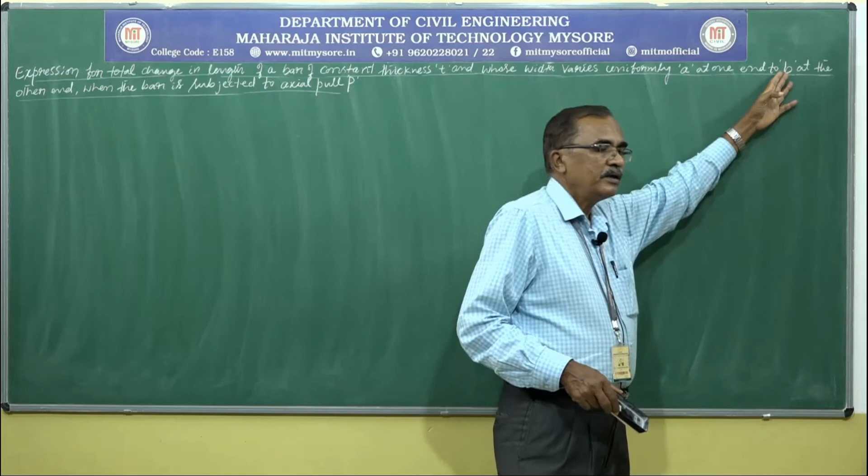Now let us consider another expression to find total change in length when a bar of constant thickness T, whose width varies uniformly from A at one end to B at the other end, is subjected to an axial pull. Here I have denoted it as A and B. It may be other than capital A and capital B also, no problem. In other words, this is a rectangular tapering section with a constant thickness.

The previous one is a circular tapering section whose diameter varies from d1 to d2. Here it is a rectangular taper section having constant thickness whose width varies from A at one end to B at the other end. So let us consider a bar of uniformly varying section having a constant thickness.

The figure is same as before, except that here we use A and B for the widths in place of D1 and D2.

Again consider a fixed end at the top. This fixity indicates that there is equal and opposite pull, subjected to axial tensile force. Let the width of the bar be A at one end and B at the other end. Let L be the length of the bar considered.

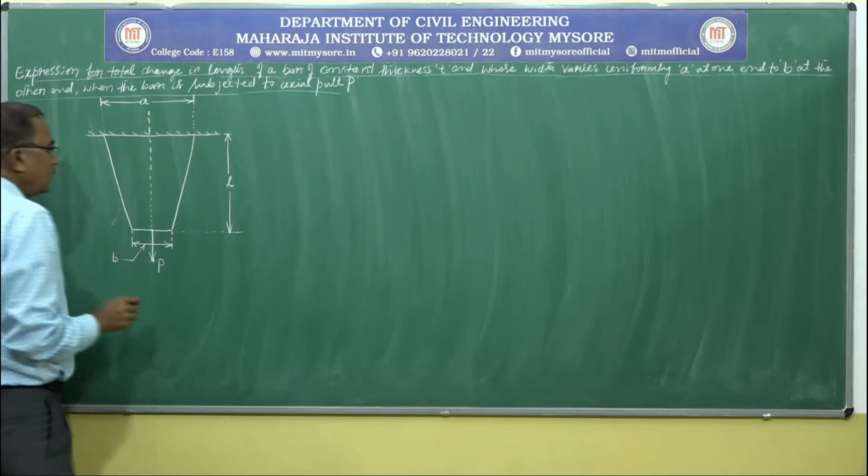Let us consider an elemental strip of this bar, of thickness dx, situated at a distance x from the free end or one end. Once we know the width of the bar at the bottom, we can find out the fractional width of the elemental strip.

On either side, the fractional width at the top is equal to A minus B by 2. Similarly, here also it is A minus B by 2. Let K be the width at the elemental portion on either side, like this.

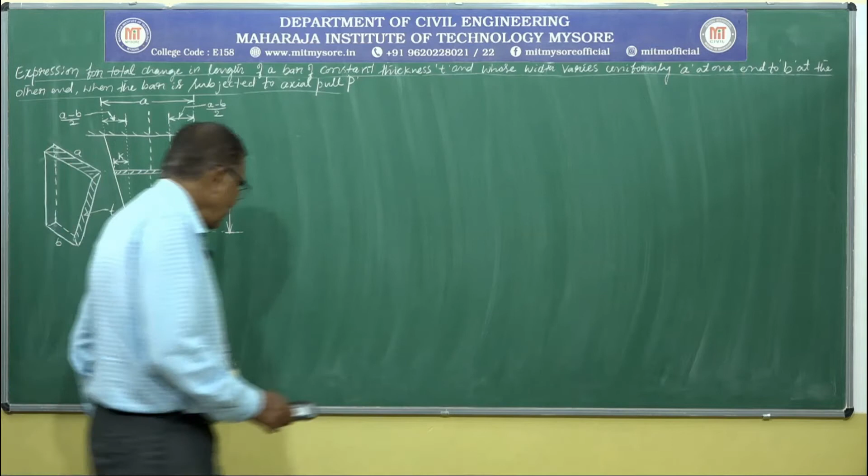So we have considered the bar of tapering section having constant thickness with width A at one end to B at the other end, subjected to axial pull P. We have considered an elemental strip of thickness dx at a distance x from one end, and the fractional width of this elemental strip on either side, corresponding to the bottom width, is equal to k.

Again, as usual, as we considered in the previous case of the bar of solid circular section, we can see two triangles here. As this is the elemental strip having negligible thickness, we can consider two triangles, one here and another there. From similar triangles, we can write the expression.

From similar triangles, k by x is equal to a minus b divided by 2, divided by L, the total length. That is, k is equal to a minus b divided by 2 times L, into x.

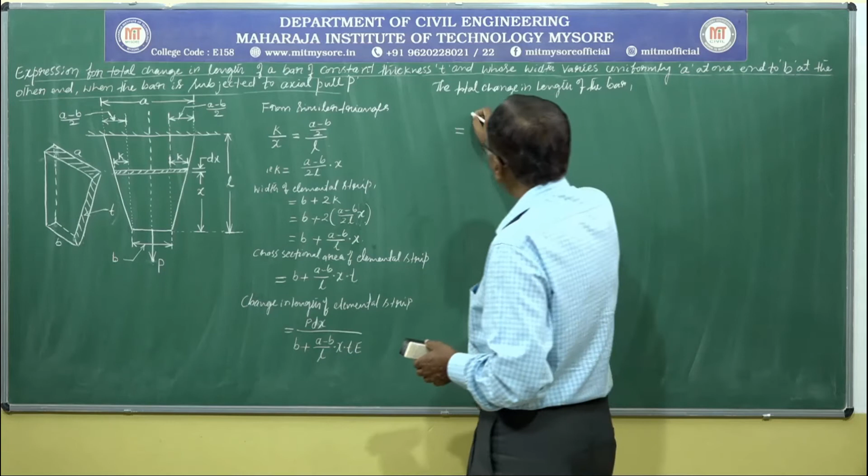So this is change in length of elemental strip. Now the total change in length of the bar is equal to, if you integrate this term by taking the range from 0 to L, we get: total change in length of the bar equals integral from 0 to L of P dx divided by B plus A minus B divided by L into X into T into E.

So we can take out this P by TE outside, giving integral from 0 to L of dx divided by B plus A minus B divided by L into X. Call this equation 1.

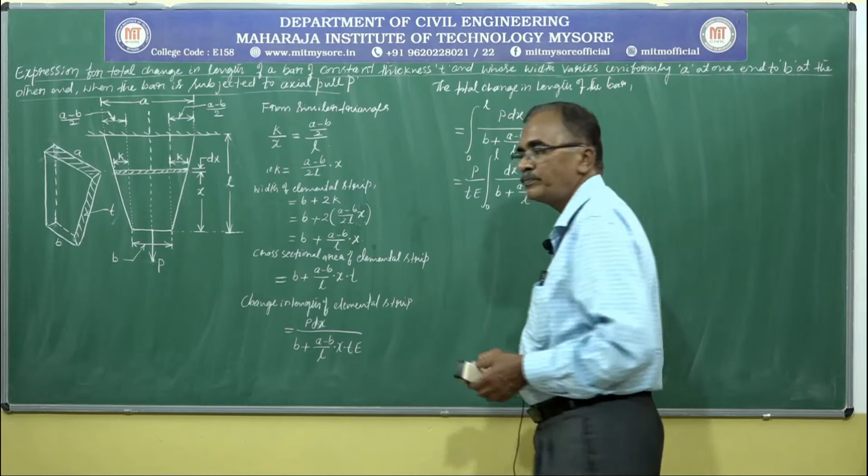Now from equation 1, let us consider this denominator. Let B plus A minus B divided by L into X be equal to Y. Call this equation 2.

Taking differential on both sides, we get A minus B divided by L is equal to dy by dx. Therefore, dx is equal to L divided by A minus B into dy.

Now let us work out the range of integration. At x equals 0, y equals B in equation 2. Similarly, at x equals L, y equals A, since the L's and B's cancel out. This is from equation 2.

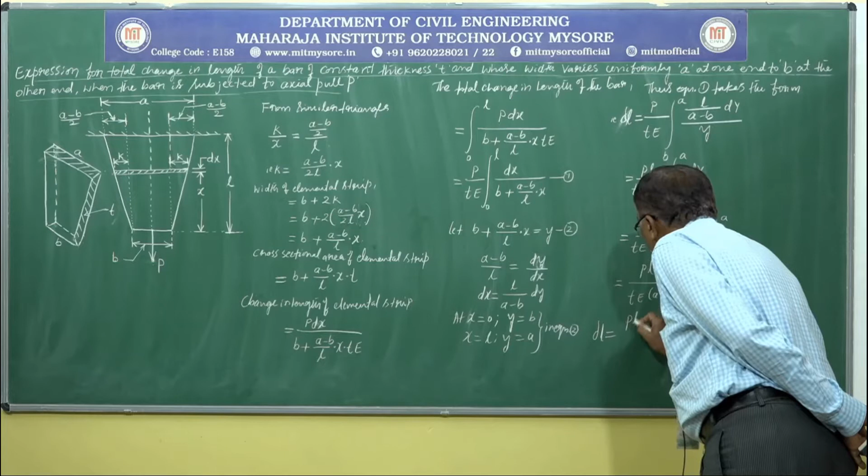Therefore, finally we can write this total change in length delta L is equal to PL divided by TE into A minus B, into log of A by B.

This is the desired expression when a bar of rectangular section having constant thickness is subjected to axial load. Here A is always greater than B.

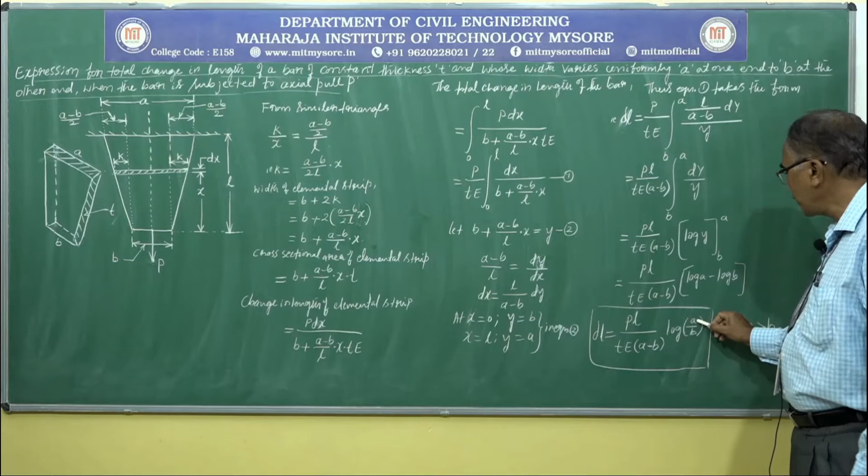Suppose if it is asked to solve a problem by giving the width, Young's modulus and length of the bar, with A being the varied width, you always have to consider the bigger dimension as A and the smaller dimension as B. So if they ask a problem on this, it may be a direct substitution problem, or after obtaining this expression they may ask you to substitute numerical values and work out the problem.

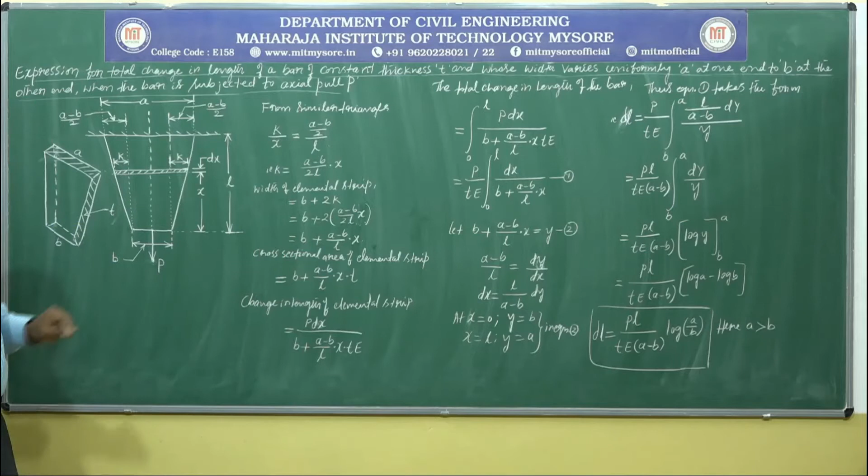So far we had come across stress, strain, then linear strain. In stress: tensile stress, compressive stress; then strain: linear strain, lateral strain, longitudinal strain; then Hooke's law, elastic limit, stress strain relations or stress strain graph. Next, principle of superposition, bar of varying cross section, bar of uniformly varying cross section, and again in bar of uniformly varying cross section: solid circular section, bar of uniformly varying solid circular section, bar of uniformly varying rectangular section with constant thickness, and the free expansion due to self weight of the bar.

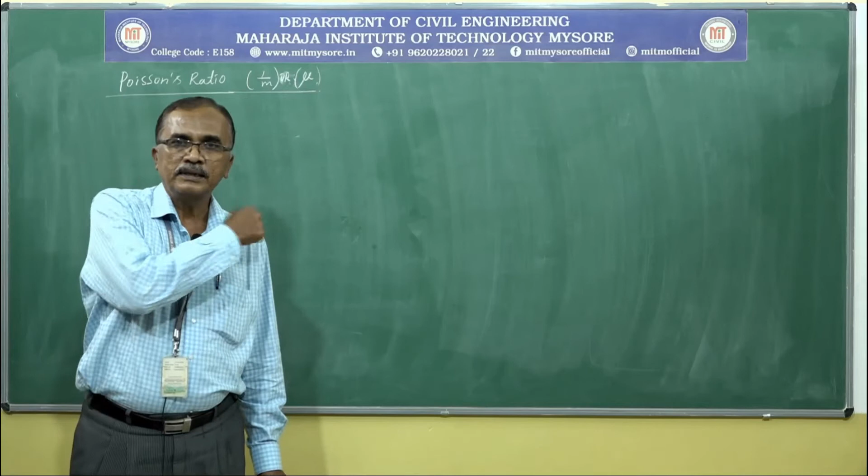Now let us move on to the other concept and terminology, considered as one of the elastic constants: Poisson's ratio, denoted by 1 over m or mu. Both symbols are acceptable. The first elastic constant we discussed is Young's modulus, and the second one we are describing now is Poisson's ratio.

Young's modulus: for every elastic material, the ratio of stress to the corresponding strain remains constant up to the elastic limit of the given material, and that constant ratio is known as Young's modulus. That is equal to F divided by E, and Young's modulus is denoted by capital E.

The unit of Young's modulus is Newton per millimeter square or kilonewton per meter square, giganewton per meter square, meganewton per meter square, and so on.

In the same line, we can define the second elastic constant, Poisson's ratio. There we use stress along with strain to define Young's modulus, whereas here to define Poisson's ratio we use linear strains. We discussed longitudinal strain and lateral strain.

Whenever an elastic body is subjected to an external force, strain not only occurs along the line of action of force, but also perpendicular to it. The strain which develops along the line of action of force is known as longitudinal strain. The strain which develops perpendicular to the line of action of force is known as lateral strain.

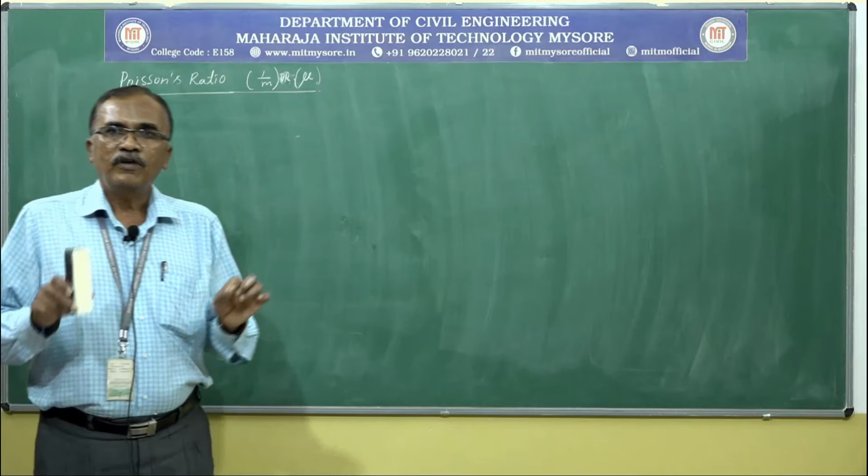We can define it like Young's modulus, using the same kind of statement: for every elastic material, the ratio of lateral strain to the corresponding longitudinal strain remains constant up to the elastic limit of the given material. This constant ratio is known as Poisson's ratio, and it is denoted by 1 over m or mu.

Poisson's ratio, 1 over m, is equal to lateral strain divided by longitudinal strain.

Therefore, lateral strain is equal to longitudinal strain divided by m. Let us call this equation 1.

So, lateral strain can be written in the form of longitudinal strain and the Poisson's ratio.

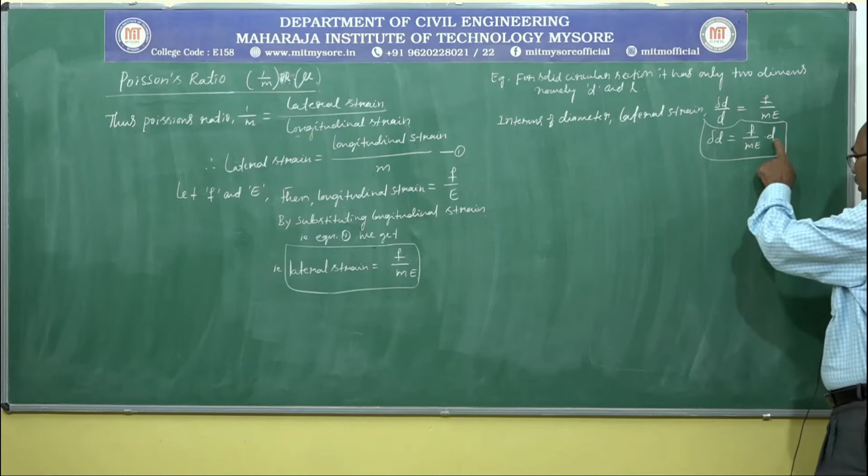lateral strain, delta D by D, change in diameter to original diameter, is equal to F divided by mE. Therefore, change in diameter delta D is equal to F divided by mE into D. Using this expression we can find out the change in diameter. Knowing the original diameter, direct stress, Young's modulus and Poisson's ratio, we can work out delta D, the change in diameter.

Similarly, for a solid rectangular section, it has three dimensions. Lateral strain along width, delta B by B, that is equal to F divided by mE. Therefore, delta B is equal to F divided by mE into B.

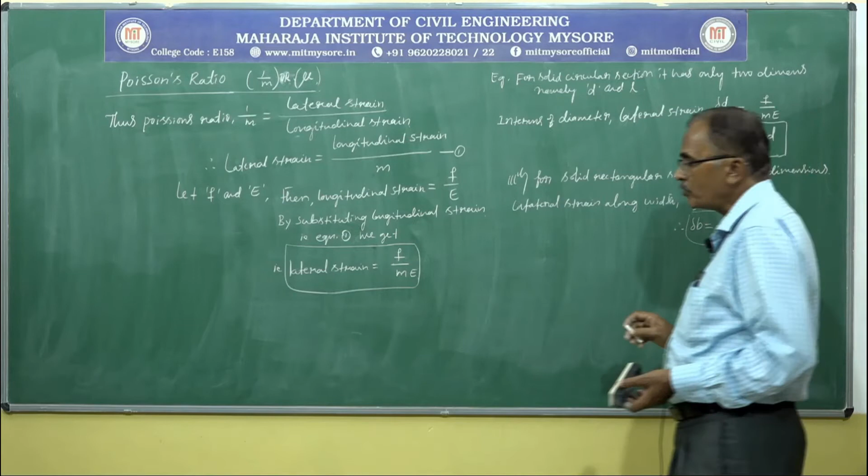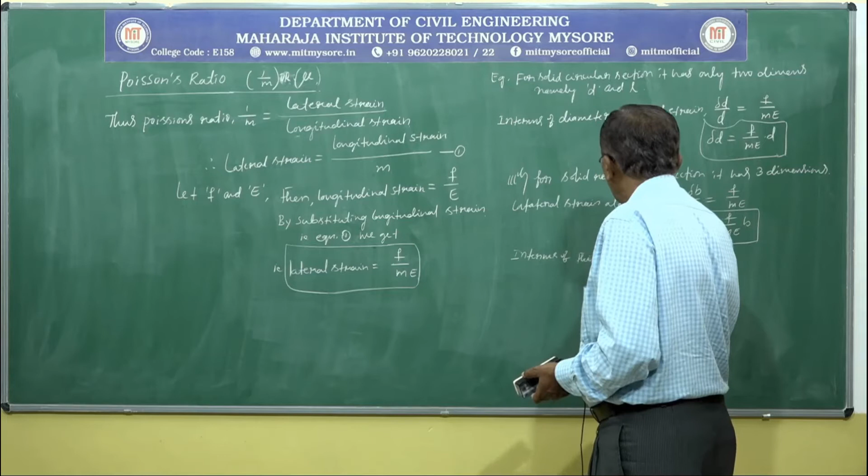And suppose if it is thickness or depth, in terms of thickness, again lateral strain is equal to delta T by T, equal to F divided by mE. Therefore, delta T is equal to F divided by mE into T.

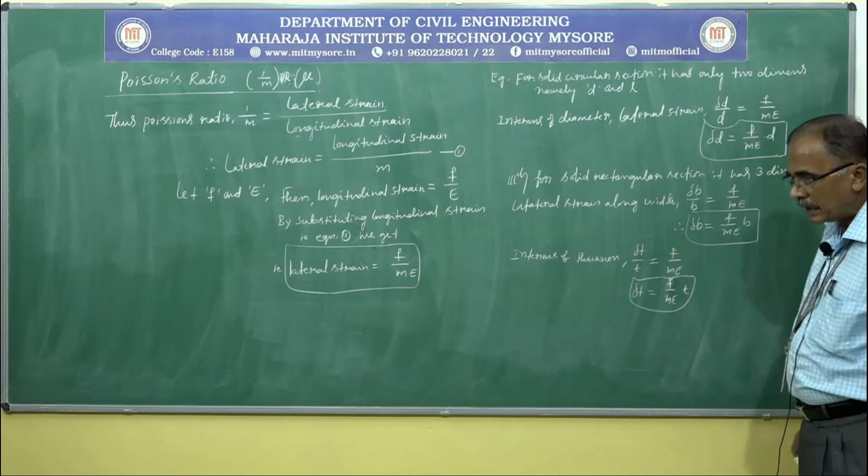So, knowing the stress, Young's modulus, Poisson's ratio and dimension of the material, we can work out the lateral strain. For a rectangular section, the change in length, longitudinal strain, can be easily calculated as change in length divided by original length. If it is a circular section, it is again change in length divided by original length for longitudinal strain.

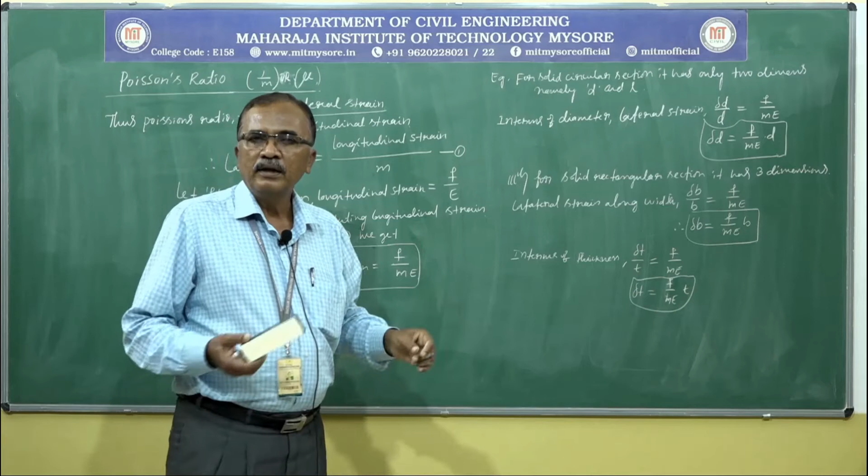So, like this we can find out the lateral strain and the corresponding change in dimensions by using the Poisson's ratio concept. Now, let's move on to another important terminology: volumetric strain, denoted by EV.

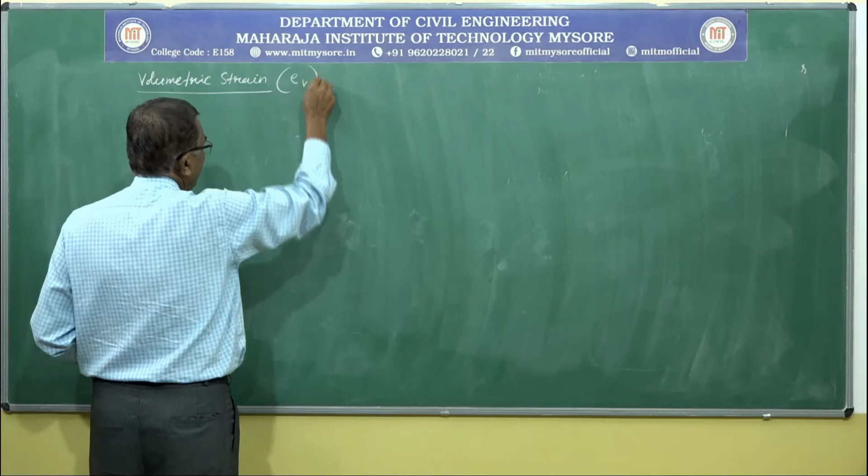Volumetric strain can also be defined in the same way as linear strain. Linear strain is equal to change in linear dimension to the corresponding original dimension. In the same line we can define volumetric strain: for a very elastic material, the ratio of change in volume to the corresponding original volume is known as volumetric strain.

That is, EV is equal to delta V divided by V, where delta V is the change in volume and V is the original volume.

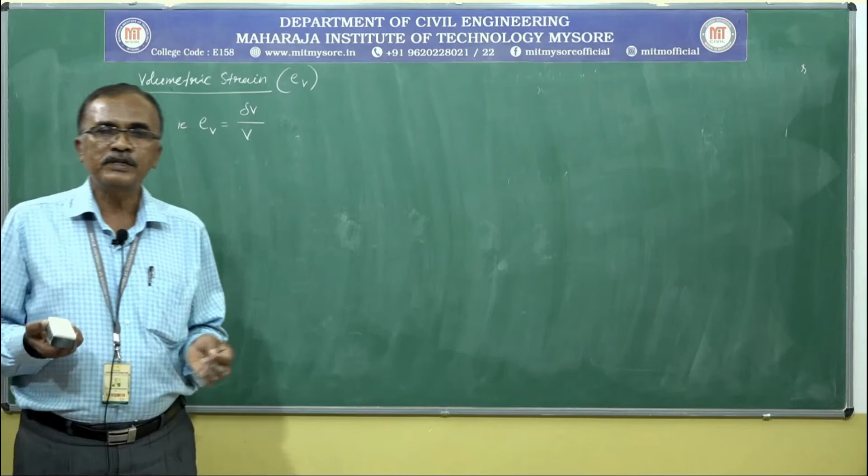Based on this volumetric strain and the Poisson's ratio which we discussed, and the previous concepts, let us derive an expression for volumetric strain when a body is subjected to direct stresses along three mutually perpendicular planes. Expression for volumetric strain when the body, or the given material, is subjected to normal stresses along three mutually perpendicular directions.

And hence, to prove that or to show that Poisson's ratio for any given material is always less than 1/2, we are going to derive expression for volumetric strain. After deriving expression for volumetric strain, when the body or material is subjected to normal stresses along three mutually perpendicular planes, we are going to show that the Poisson's ratio for any given material is always less than 1/2 or half.

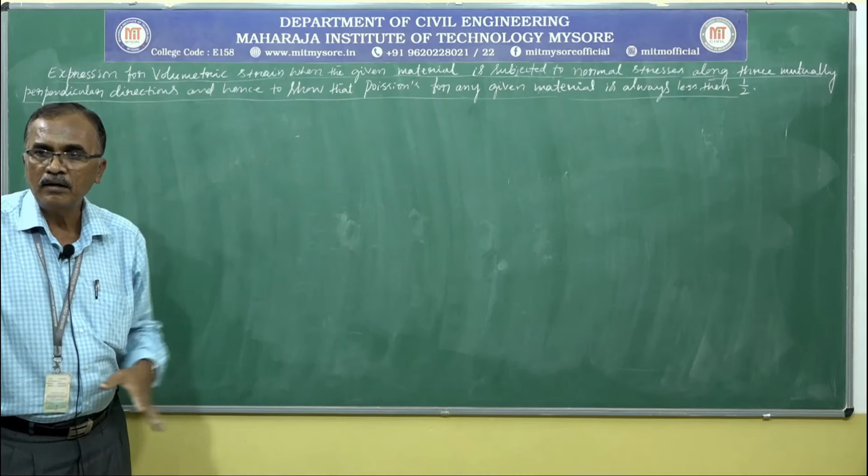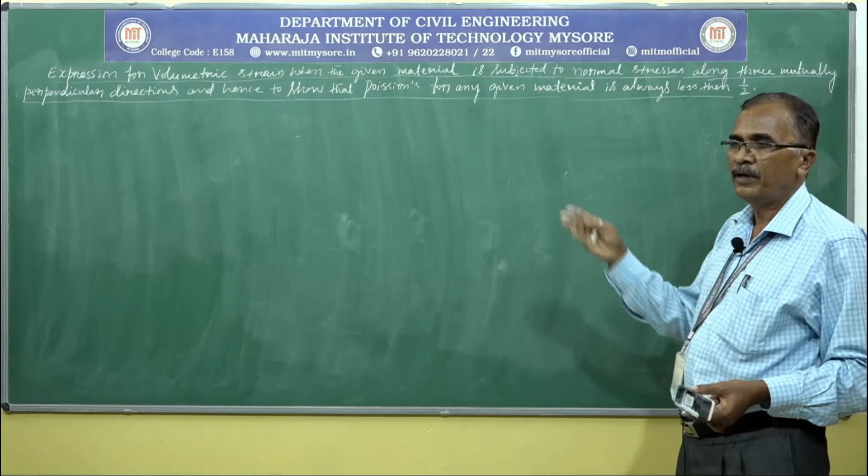From this, you can easily understand that Poisson's ratio value for any given construction material is less than 0.5. Just remember this, register in your mind. Value of Poisson's ratio is always less than 0.5, and majority of the materials are not even approaching 0.5. It's less than 0.5 only - it's 0.25, 0.3, maximum it is 0.35, something like that. Only rubber has a Poisson's ratio that reaches close to 0.5.

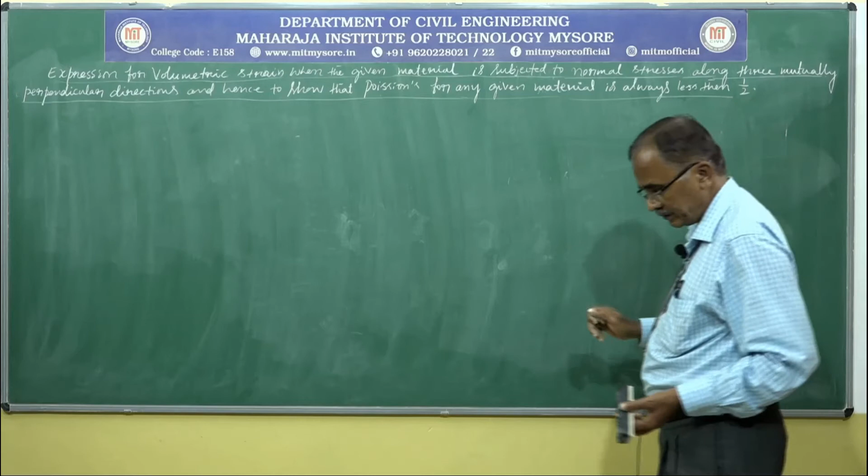So Young's modulus for structural steel, the maximum value of Young's modulus for structural steel, is about 200 GPa, and Poisson's ratio for any given material is always less than 0.5. It never crosses unity, even it never crosses 0.5.

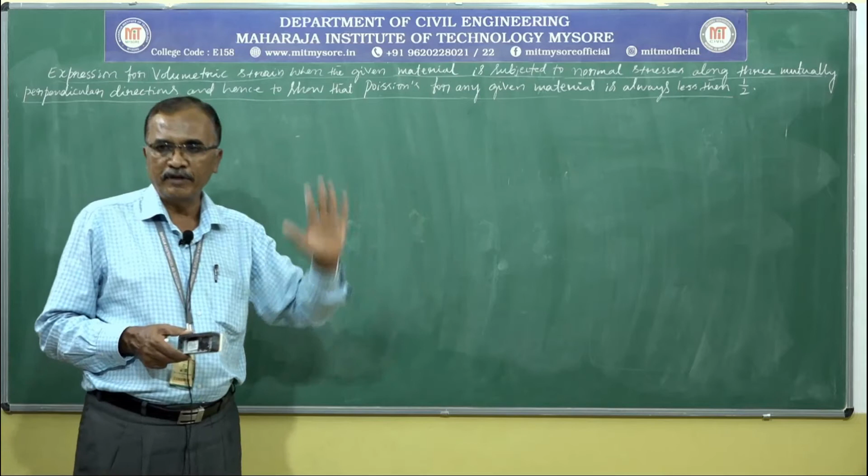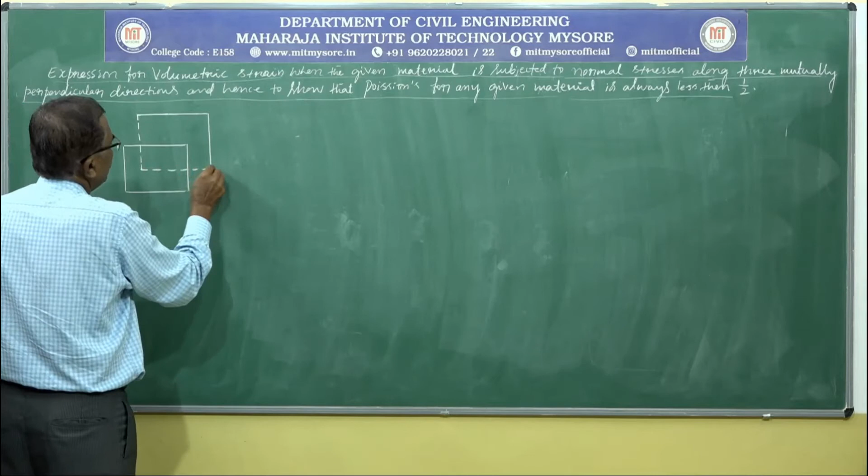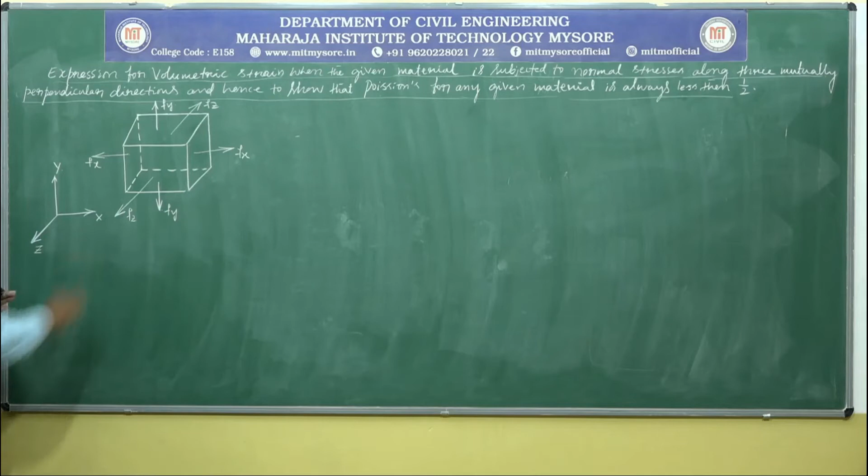Now, in order to derive the expression, let us consider a cube. Let this cube be subjected to normal stresses along three mutually perpendicular planes, say Fx, Fy and Fz. In this 3-dimensional figure, you can see the directions - this is x direction, y direction, and this is z direction. So we have considered an elemental cube subjected to normal stresses along 3 mutually perpendicular directions.

Let E be the Young's modulus of the material, and 1/m be the Poisson's ratio. This cube is subjected to normal stresses along 3 mutually perpendicular directions. Because of this normal stress, we can expect a strain along 3 mutually perpendicular directions. Let Ex, Ey and Ez be the strains along 3 mutually perpendicular directions due to this applied normal stress.

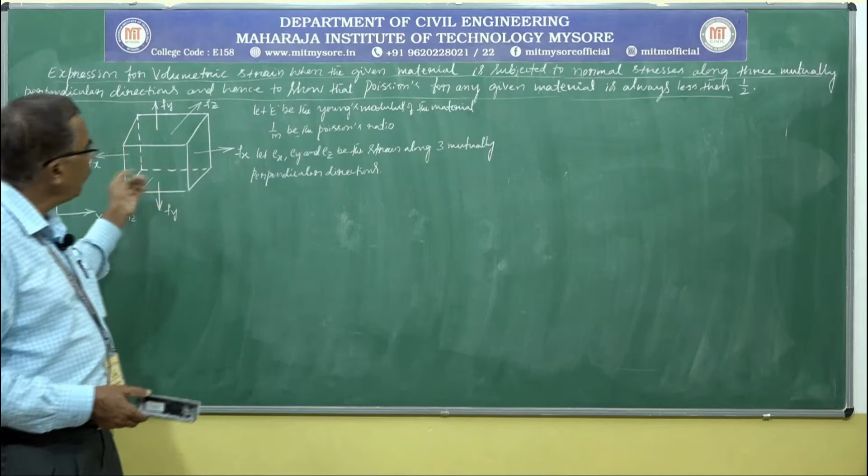Now we can write the expression for these strains along 3 mutually perpendicular directions. So we can write strain along direction x due to fx. If you write the strain expression for strain along x direction due to this normal stress fx, then that strain will be Ex. Let us recall, whenever a body is subjected to axial force, strain not only occurs along the line of action of force, but also perpendicular to the line of action of force. Here, due to applied normal stress, strain will develop along the line of action of stress and also perpendicular to the line of action of force. There are 3 lines of action of force here - x direction, y direction and z direction. If you measure strain along the force direction or stress direction, that will be a longitudinal strain, and the strains which develop due to this applied stress in the other directions will be lateral strains.

So we can write the expression for strain in one direction in 3 terms. That is, linear strain along x direction due to fx is equal to - first one is along the stress direction which is the longitudinal strain, the other one is lateral strain and the other one is also lateral strain. That is, you can write strain along x direction due to fx, that is Ex, is equal to fx by E. Longitudinal strain can be written in terms of direct stress and Young's modulus. So this is the longitudinal strain when we are measuring strain along x direction.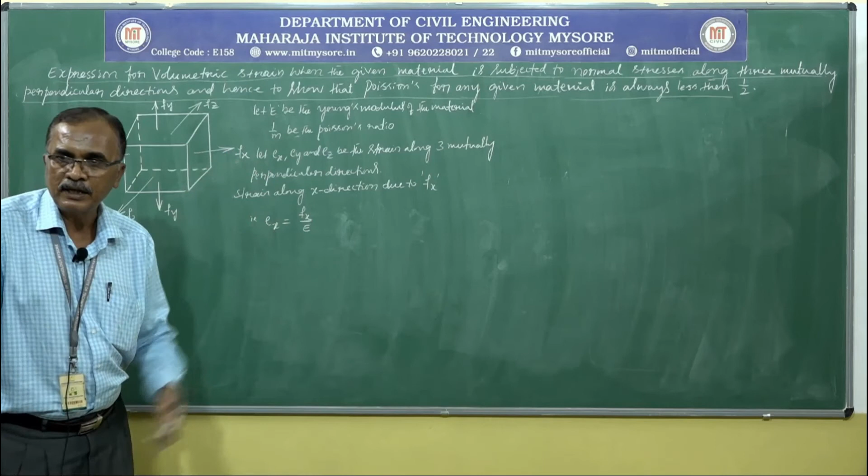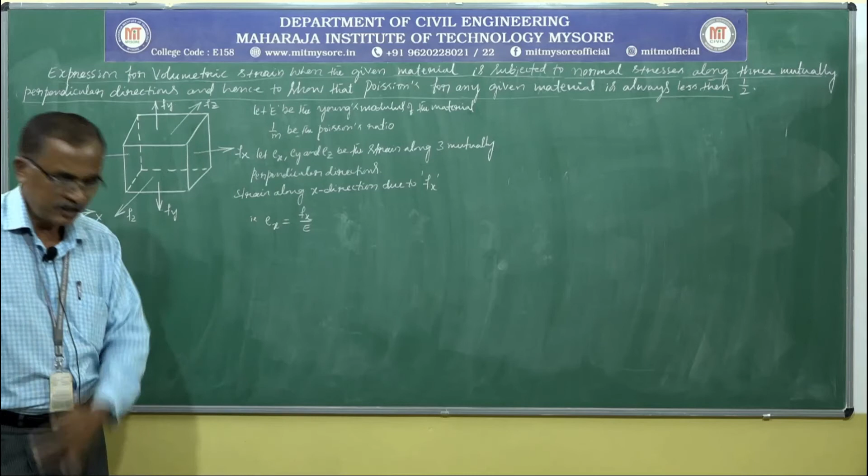The strain will develop along y direction and z direction also, and these perpendicular direction strains are called lateral strain, and that lateral strain can be expressed in terms of direct stress, Young's modulus and Poisson's ratio. Also, we have discussed that the longitudinal strain and lateral strains are always opposite in nature. Now we can write the expression for strain along x direction like this: Ex is equal to fx divided by E minus Fy by mE - this is lateral strain. Strain along x direction due to Fx is equal to Ex. First one is longitudinal strain because it is x direction, and this is lateral strain, and also the strain along z direction is also lateral strain, Fz by mE. The negative sign in this expression indicates that lateral strains are always opposite in nature to the longitudinal strain.

Similarly, strain along y direction due to Fy, that is Ey, is equal to - here the longitudinal strain will be Fy by E, Fy by E minus Fz by mE minus Fx by mE.

And strain along z direction due to Fz, that is Ez, is equal to Fz by E minus Fx by mE minus Fy by mE.

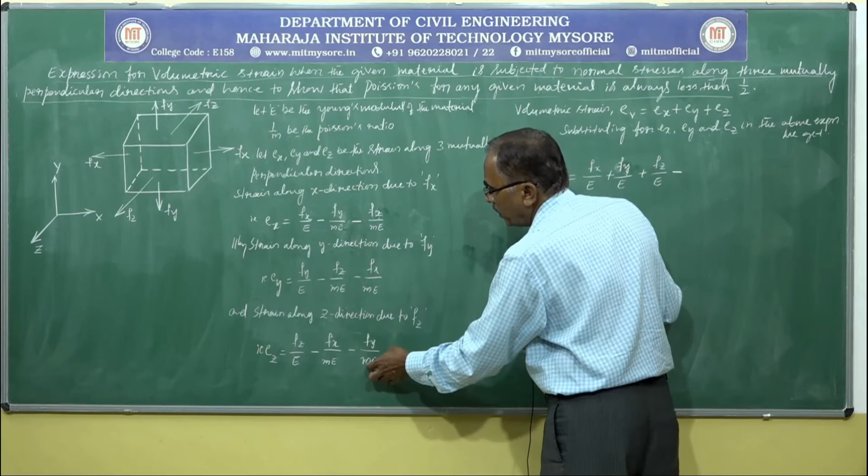Next, we have a negative sign in the second terms of all three expressions. There are 2 terms here, so we can take 2 divided by m as a common factor, left with Fx plus Fy plus Fz.

This can also be written as Ev is equal to Fx plus Fy plus Fz divided by E, into 1 minus 2 over m. So this is the desired expression for volumetric strain.

So Ev is equal to Fx plus Fy plus Fz divided by E into 1 minus 2 over m. Next, for volumetric strain to exist, 1 minus 2 over m is always greater than 0, or minus 2 over m is always greater than minus 1, so 2 over m is always less than 1.

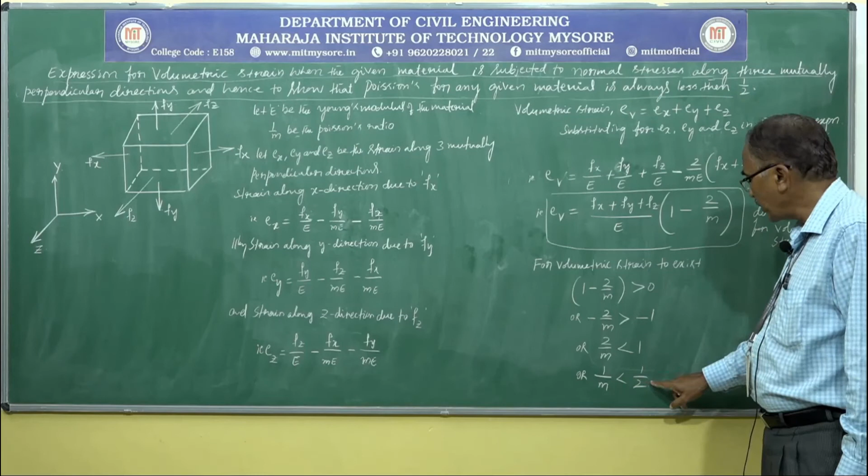Or 1 over m is always less than 1 by 2. This shows that for any given material, Poisson's ratio is always less than 1 by 2. So like this you can show or prove that Poisson's ratio for any given material is less than 1 by 2. So this is the expression for volumetric strain in terms of normal stresses, Young's modulus and Poisson's ratio.

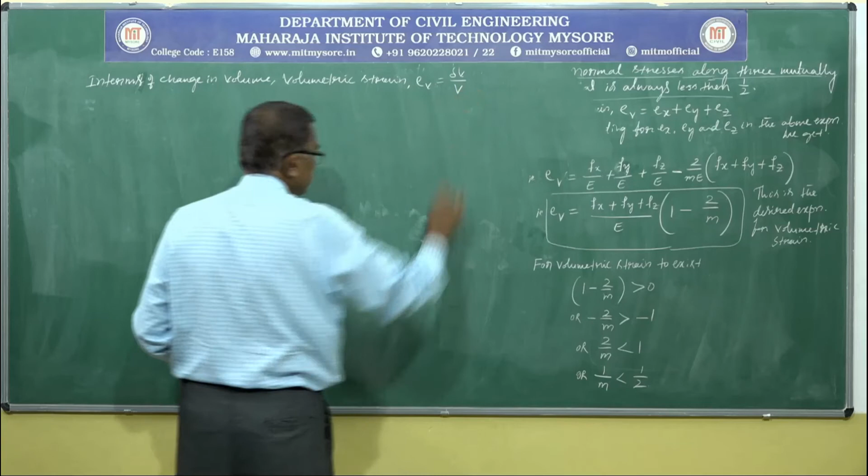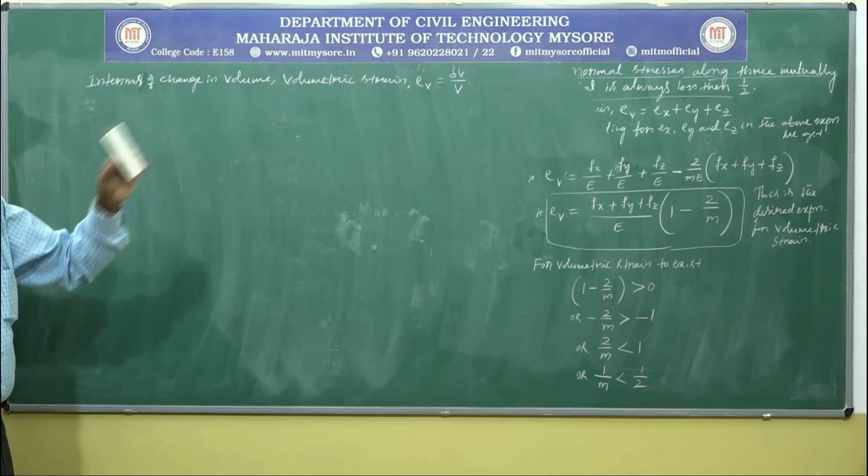Next, volumetric strain can also be expressed in terms of change in volume. In terms of change in volume, volumetric strain Ev is equal to delta V divided by V. So this volumetric strain in terms of change in volume can be related to the volumetric strain obtained based on the normal stress, Young's modulus and Poisson's ratio.

That is, delta V by V is equal to Fx plus Fy plus Fz divided by E into 1 minus 2 over m. Therefore, change in volume delta V is equal to Fx plus Fy plus Fz divided by E into 1 minus 2 over m, multiplied by V. We can use this expression to find change in volume of a body or material when it is subjected to normal stresses along 3 mutually perpendicular planes.

So these are the expressions for volumetric strain when a body is subjected to normal stresses along 3 mutually perpendicular planes. Suppose the body is subjected to only one normal stress, there also volumetric strain can be calculated. Under such circumstance, the expression for volumetric strain reduces to Ev is equal to Fx by E into 1 minus 2 over m. So when a body is subjected to only one direct stress, assuming it acts along the x direction, we can write the expression for volumetric strain Ev is equal to Fx divided by E into 1 minus 2 over m.

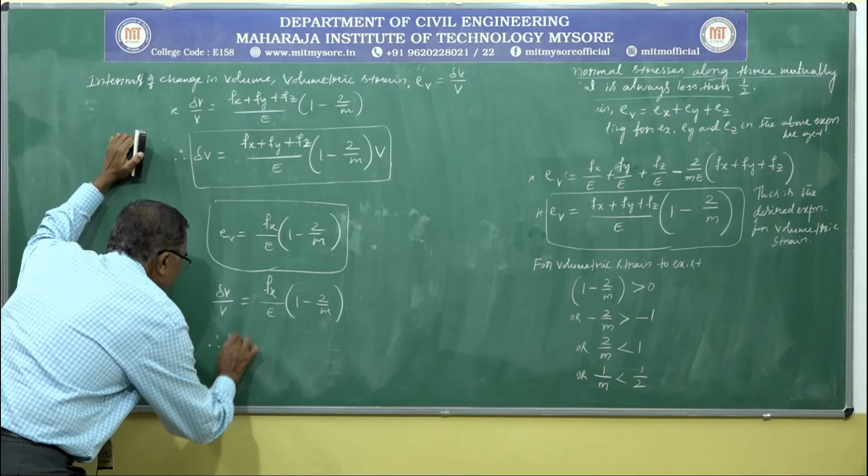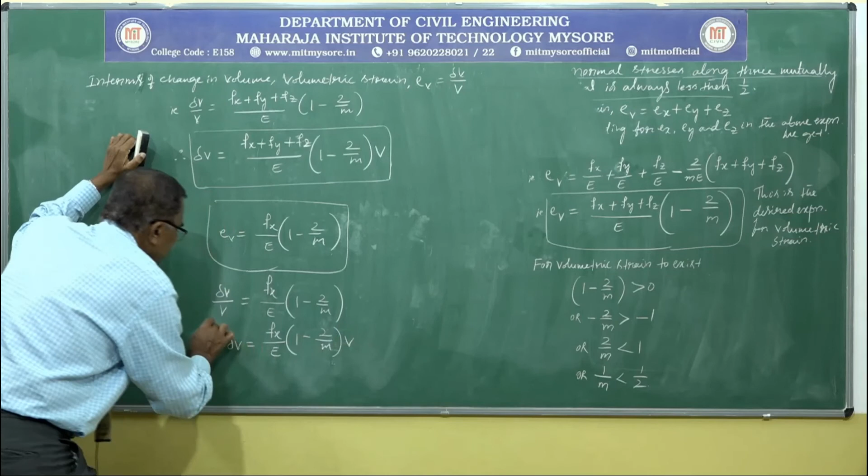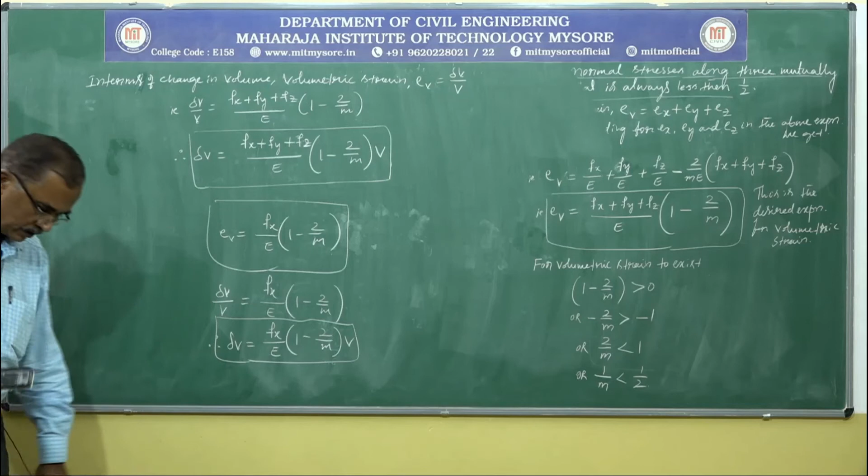Also, in terms of change in volume, the above expression can be rewritten as delta V by V is equal to Fx by E into 1 minus 2 over m. Therefore, change in volume delta V is equal to Fx by E into 1 minus 2 over m, multiplied by V. So like this we can write expressions, and the same expressions can be used to solve numerical problems.

Now, in order to understand these concepts of Poisson's ratio and volumetric strain, let us consider a few simple numerical examples. A steel bar 50 millimeter wide and 12 millimeter thick and 300 millimeter long is subjected to an axial pull of 110 kilonewton.

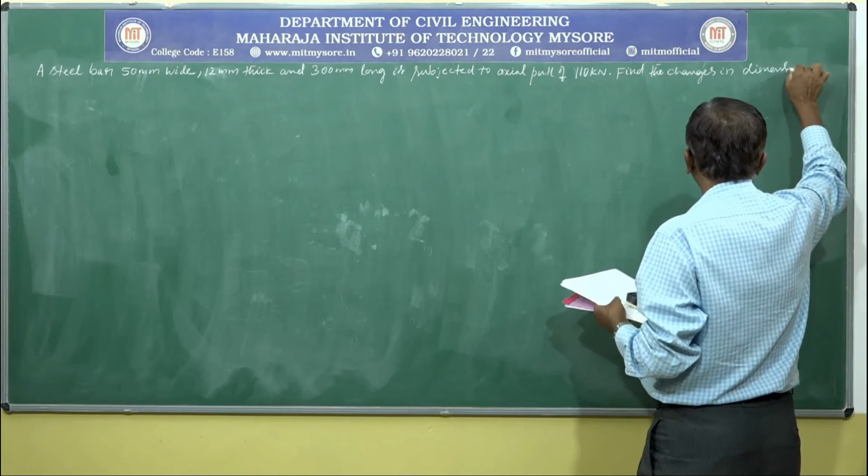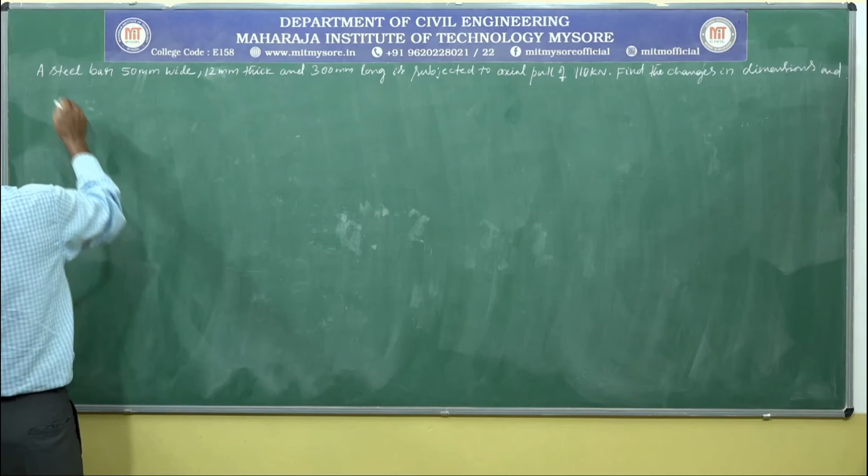For this, it is asked to find the changes in dimension and volume of the bar, by taking Young's modulus E equal to 205 GPa and Poisson's ratio 1/m equal to 0.25.

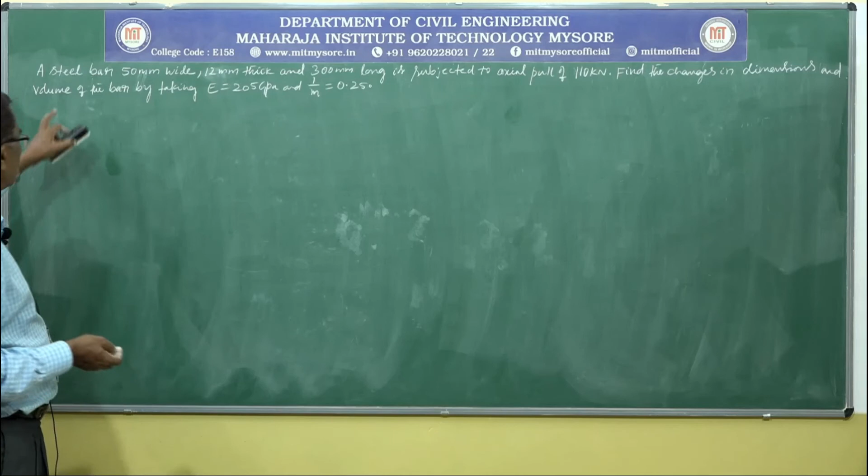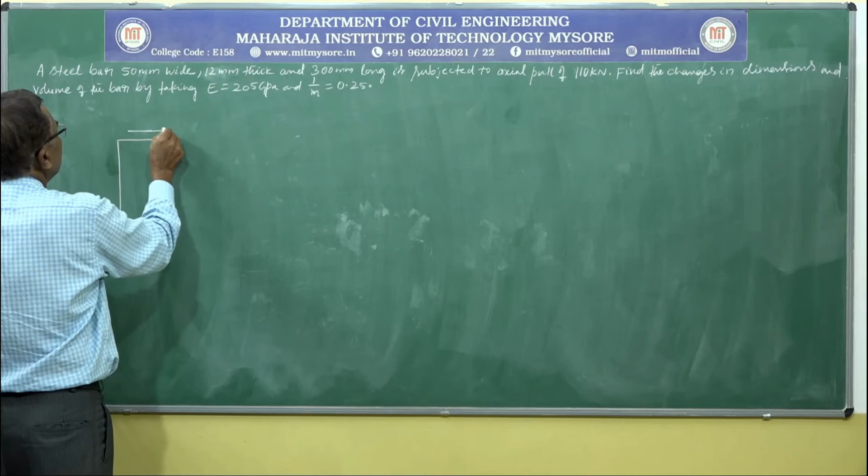So whenever we come across this type of problem, it is better we write the appropriate figure. Based on the figure we can write the cross sectional area and also decide the longitudinal and lateral dimensions. A steel bar 50 millimeter wide, 12 millimeter thick and 300 millimeter long means it is a solid rectangular beam: 50 millimeter wide, 12 millimeter thick, 300 millimeter long.

Subjected to an axial pull of 110 kilonewton. It is subjected to an axial pull of 110 kilonewton.

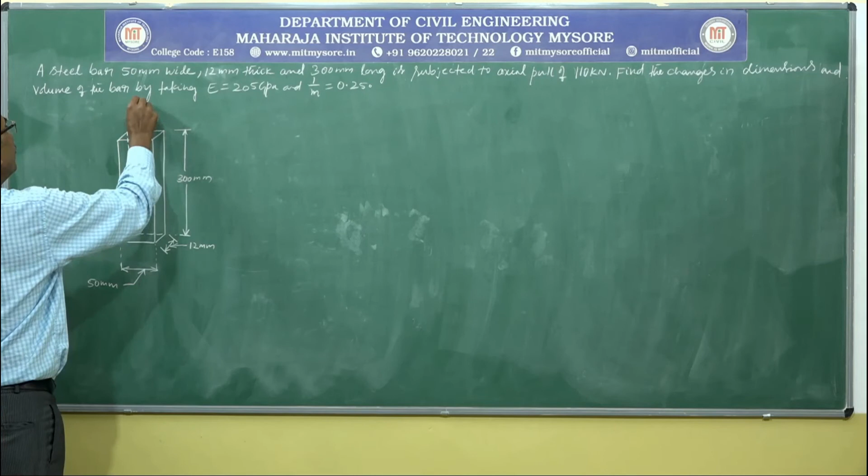For this condition, we are asked to find changes in dimensions and volume of the bar, which is nothing but change in volume of the bar, by taking Young's modulus E equal to 205 GPa and Poisson's ratio 1/m equal to 0.25.

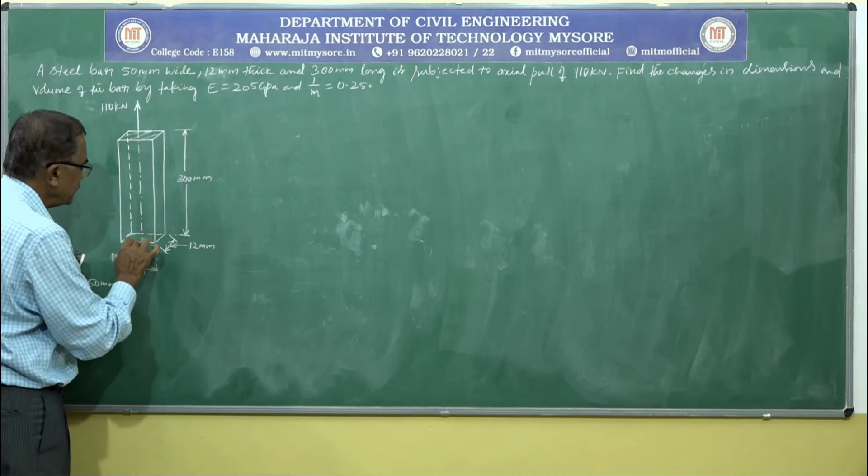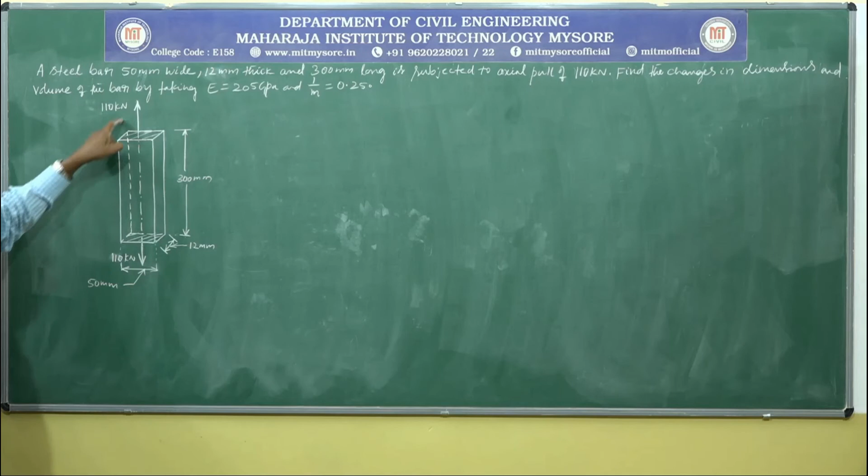We have considered this figure and written it again to clarify the cross sectional area. In majority of cases we get confused about which cross sectional area to take, particularly when we come across a rectangular section. Some directly take the longer dimension multiplied by width, 300 multiplied by 50, as the area. That is not correct. While working out the problem we should consider the actual cross sectional area, as shown in this isometric view where the hatched portion is the cross section.

Now let us write the given data. If you write the figure and analyze it with correct converted data, it becomes very easy to solve the problem. Given: B equal to 50 millimeter, thickness T equal to 12 millimeter, L equal to length of the bar 300 millimeter, subjected to an axial pull of P equal to 110 kilonewton, that is 110 into 10 power 3 Newton.

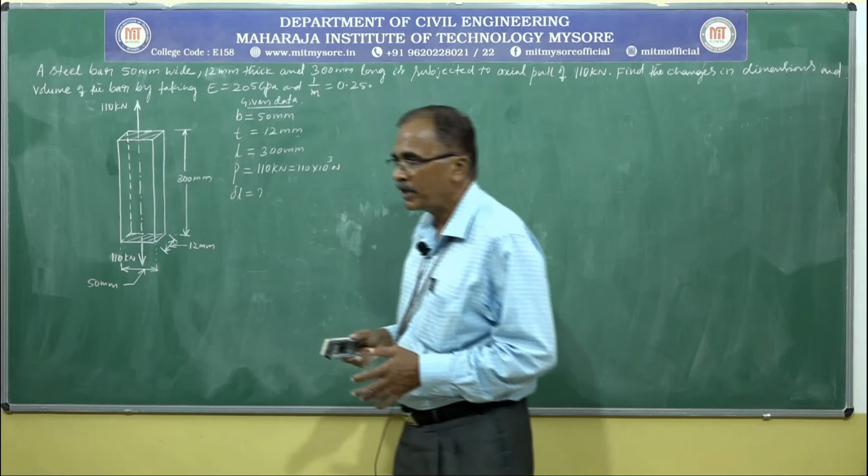It is asked to find the changes in dimension, which is nothing but delta L. When the bar is subjected to axial pull like this, strain occurs along all three dimensions. Strain along the length is called longitudinal strain, and strain perpendicular to the length is called lateral strain. So delta L equals question mark, delta B equals question mark, delta T equals question mark, and delta V, the change in volume, also equals question mark.

Now, delta L, the change in length, can be easily calculated as PL divided by A into E. Next, delta B, delta T, delta V can also be calculated using the direct stress, Young's modulus, and Poisson's ratio. Since we use the cross sectional area for all four cases, let us calculate the cross sectional area first.

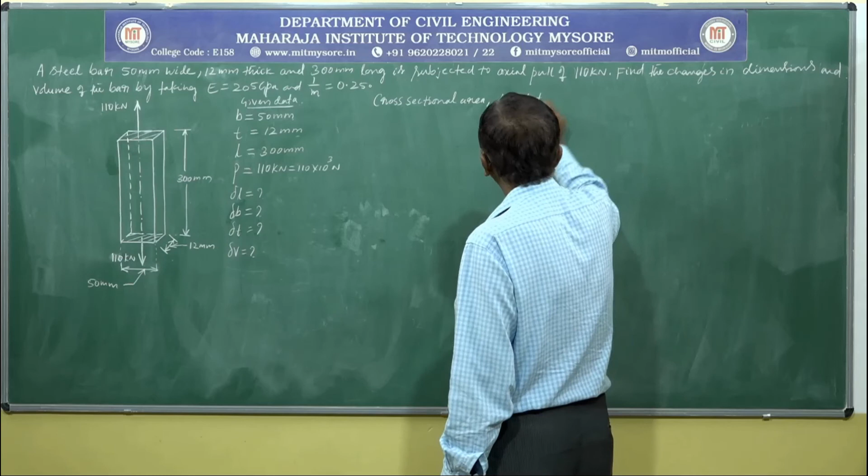Cross sectional area A equals only the cross sectional dimensions. Here cross sectional dimension means B into T, not L into T or L into B. So A equals B into T, that is 50 multiplied by 12, which is 600 millimeter square.

As stress is required to calculate the change in width, thickness, and volume, let us calculate the direct stress here itself. Direct stress or normal stress, F, equals P divided by cross sectional area, that is 110 into 10 power 3 divided by area 600, which equals 183.33 Newton per millimeter square.

So knowing cross sectional area and direct stress, we can now easily calculate the change in dimensions. Change in length, delta L, can be calculated using the conventional equation: delta L equals PL divided by A into E, that is 110 into 10 power 3 multiplied by 300, divided by cross sectional area 600 into E, Young's modulus of the material 205 into 10 power 3 Newton per millimeter square. Solving, we get delta L equals 0.26 millimeter.

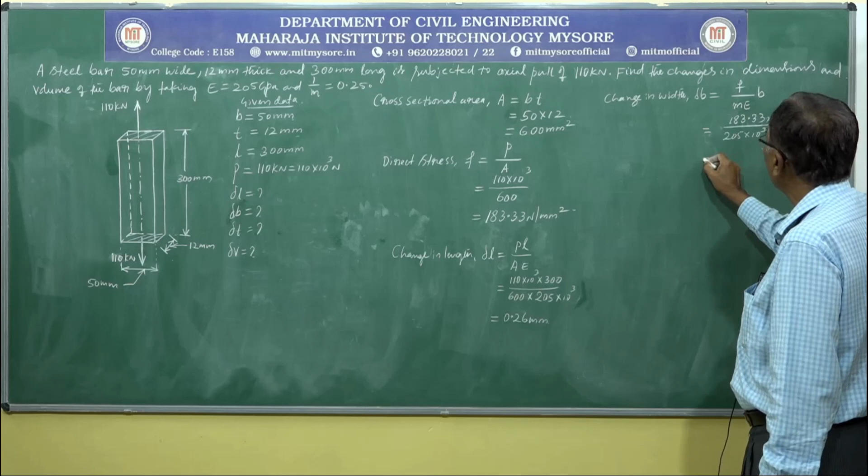Next, change in width. Delta B equals, we can write the expression for change in width in terms of direct stress, Young's modulus, and Poisson's ratio: F divided by ME into B, the original width. That is direct stress 183.33 divided by Young's modulus 205 into 10 power 3, Poisson's ratio 0.25, multiplied by width 50 millimeter. Solving this we get 0.011 millimeter.

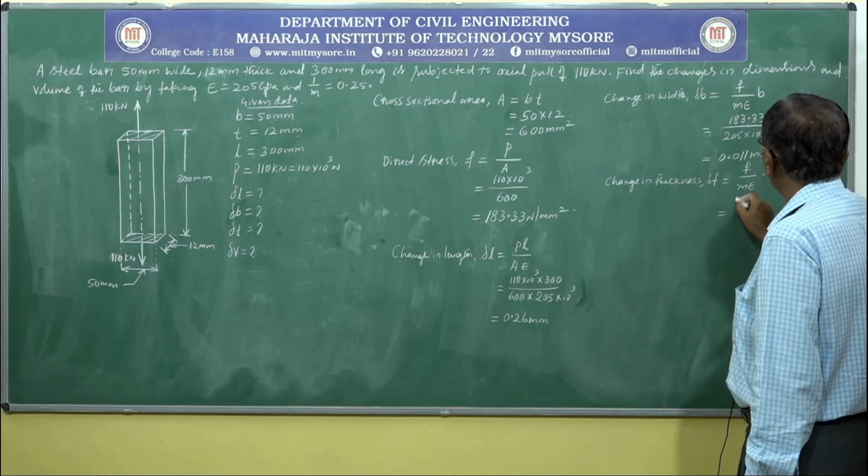Next, change in thickness. Delta T equals, again, F divided by ME into original thickness, that is 183.33 into 0.25 Poisson's ratio, divided by Young's modulus 205 into 10 power 3, multiplied by thickness 12 millimeter, equals 2.68 into 10 power minus 3 mm.

And change in volume, delta V equals, again, F divided by E into 1 minus 2 over M, into V. Here V equals area multiplied by L, giving the volume: A into L, that is 600 multiplied by 300 mm cube. So delta V equals F, 183.33, divided by 205 into 10 power 3 into 1 minus 2 into 0.25, multiplied by V, 600 into 300. It gives us change in volume, delta V equals 80.48 millimeter cube.